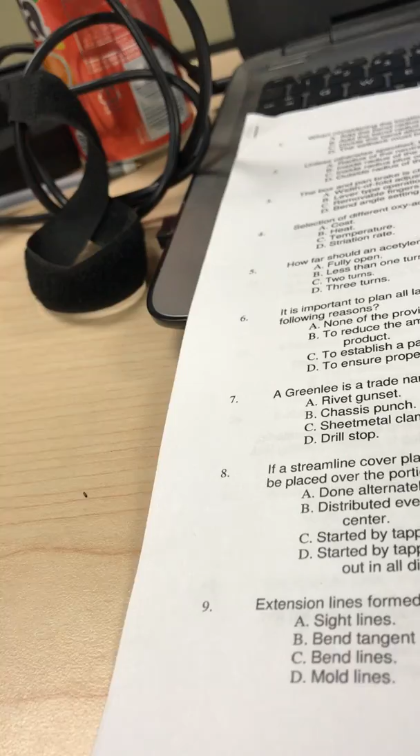I'll review them, any of them you like me to do, just let me know what number you got. What exam. I have to use a calculator. Yeah, go ahead. Yeah, 86. You have to use the calculator to figure out you have 86%. Yeah, I didn't. It's like 2% each or what? Yeah.

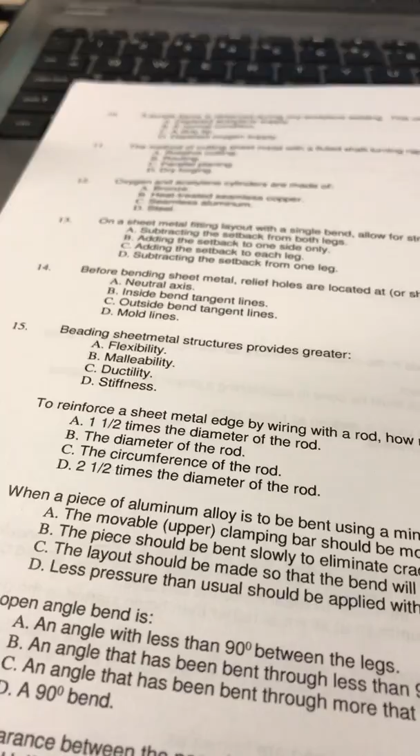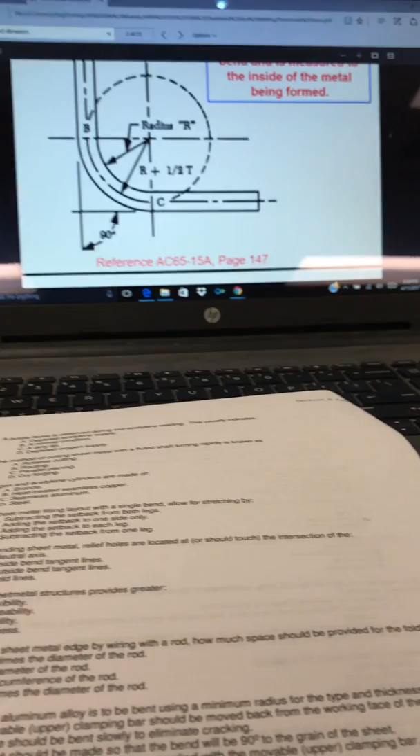So number 11 is. Could you go to number 11 on form B? B, yeah, number 11. B11. That one was a little confusing.

B11. The method of cutting sheet metal with a fluted shaft turning rapidly is known as routing. If they have a lot of parts in a production world where they're trying to make airplane parts all the same, they take a group or at least a stack of aluminum, put it on a template, then run that against a router in order to carve out all of the parts at the same time. They do the same thing in woodworking, but it's usually a one-off piece only, while in sheet metal work multiple pieces are done at the same time. So, routing.

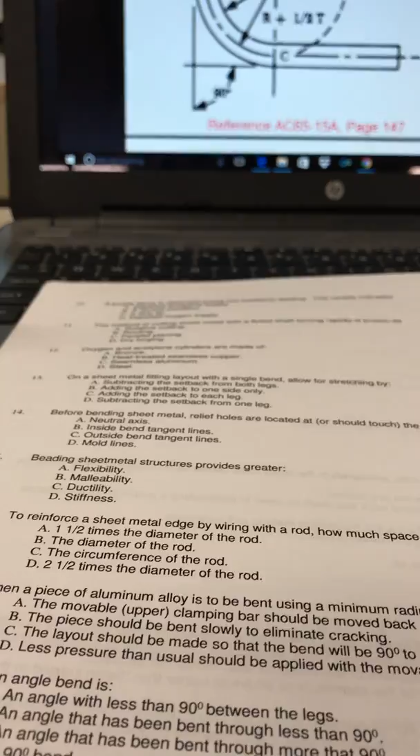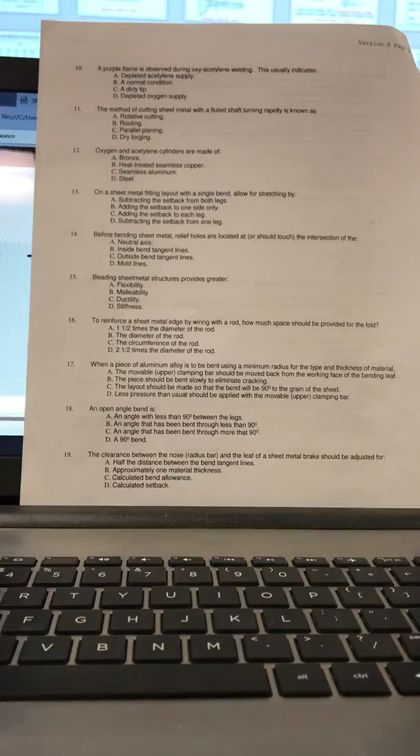Which one? 36C. 36 on B. C. Sorry, 36. C36. I don't even remember talking about concave.

36. Which statement about forming a concave and convex formed flange is correct? Well, let me look at a slide, maybe take a look at it.

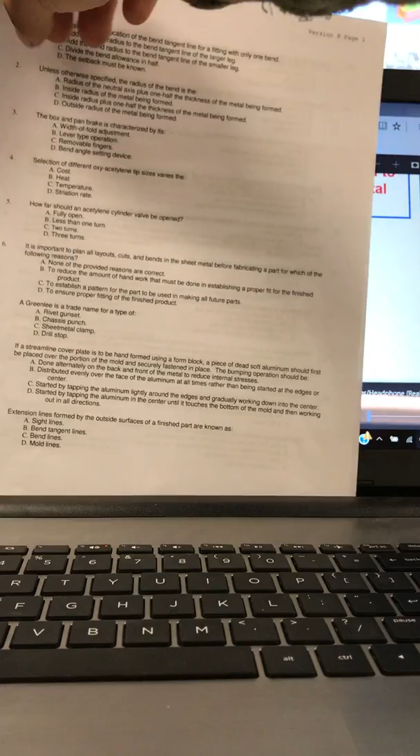Concave, or anything that's being built on a concave, is generally stretched, because what you're doing is forcing the material into the confine of something that is larger than it originally was. So you're stretching the material. For example, if you're trying to make a blister and tapping the material into the mold, you're actually stretching the material. Same thing with anything like a curved flange. Well, let me show you a picture.

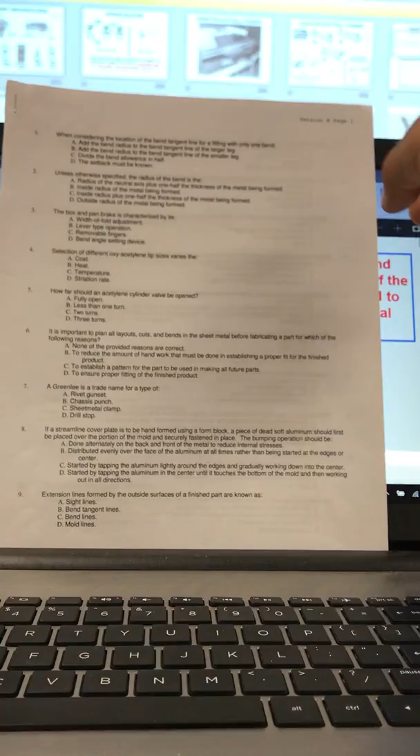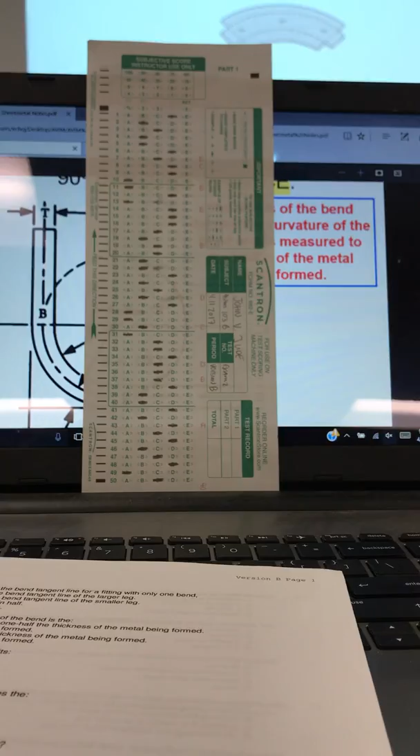Curved flange. They showed this briefly also in that Army video I showed you last week. Here's an example of the concave side of it and also the one that's convex. On the concave side, what they're doing is stretching, so they're doing this side of it. What you kind of have to think of, this represents a portion or an arc of a circle.

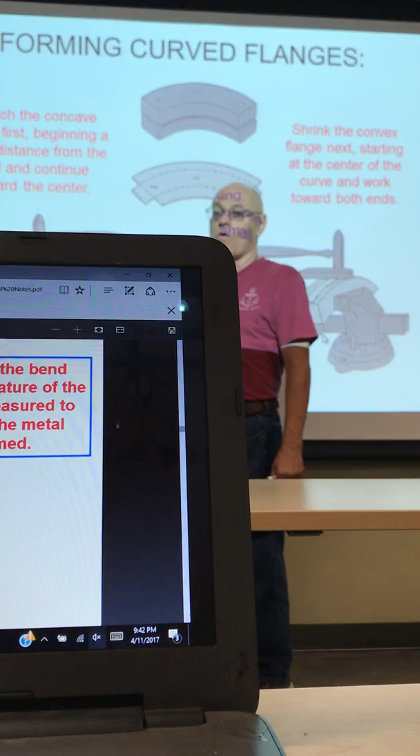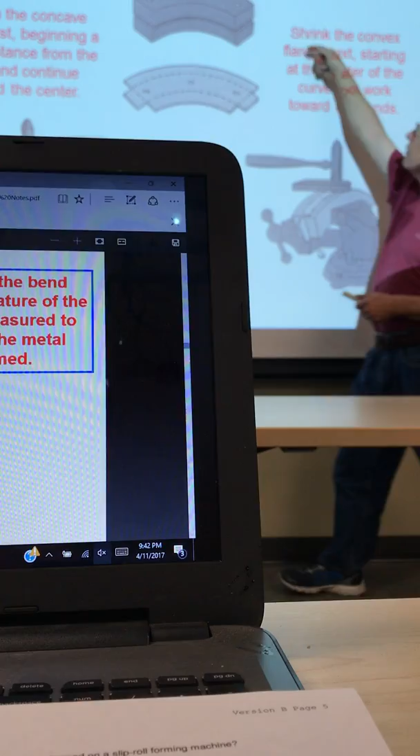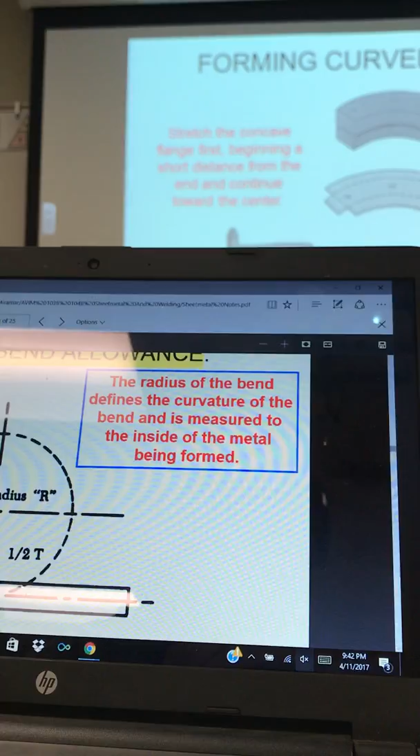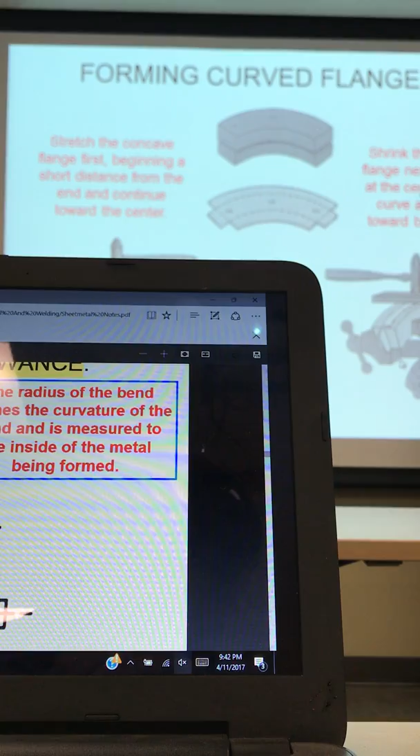So what they're doing is taking the aluminum and bending it over on the inside surface of that thing. The material is spreading out over a wider area, so technically it's stretched. On the other side, what they're doing is tapping the material over. The material is forming into a smaller area, so it's actually being shrunk. In that case, they have to prevent it from buckling over. A lot of times they'll use a forming block to tap it over the side. But in this case, it's actually been shrunk, formed over a smaller area.

Okay. So, thank you, let's see. That was question what, 36? 36? You got that one wrong too.

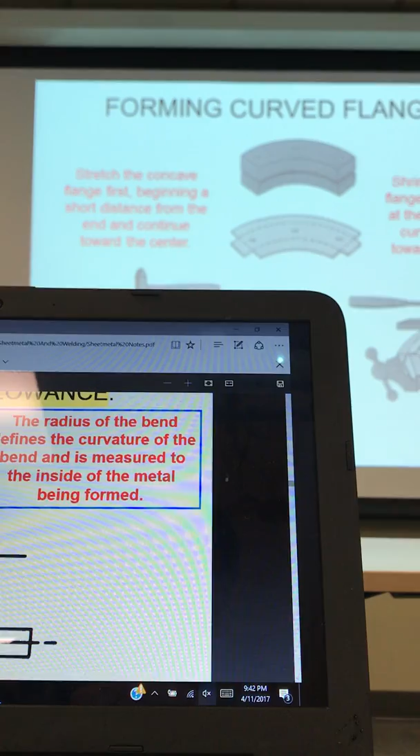34. Which statement about forming concave and convex formed flanges and parts is correct? Looks like the concave one is stretched, so the correct answer looks like A. It's A.

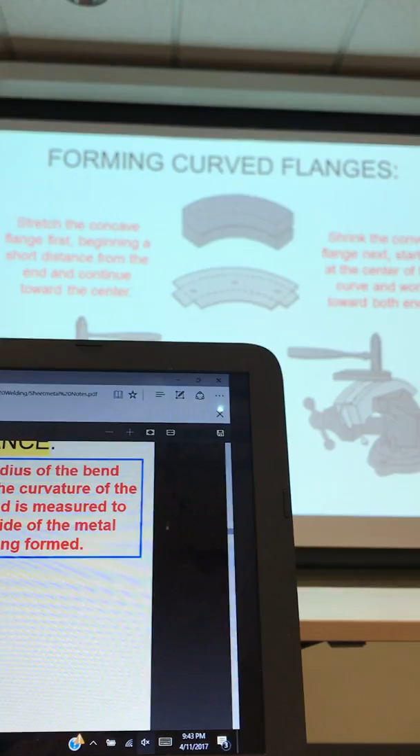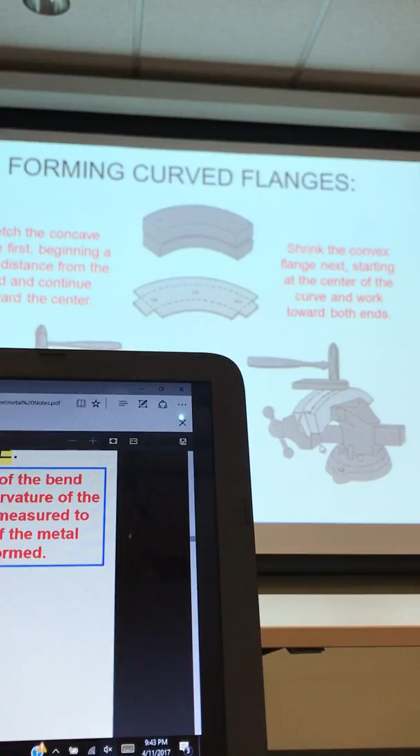6. Any of the others?

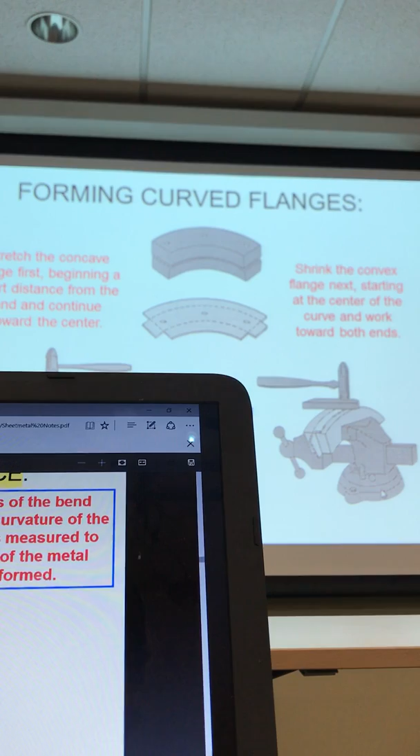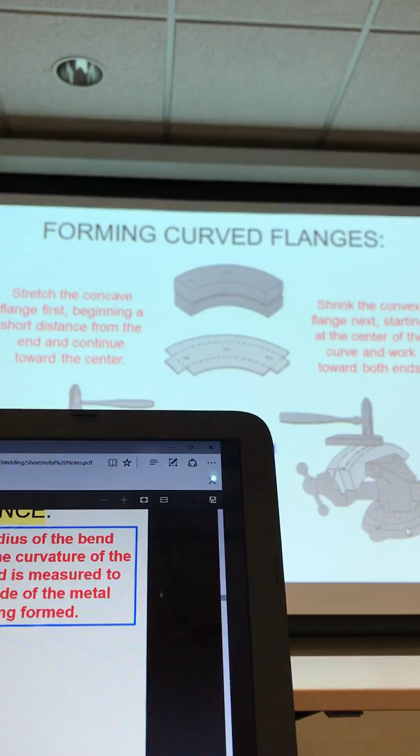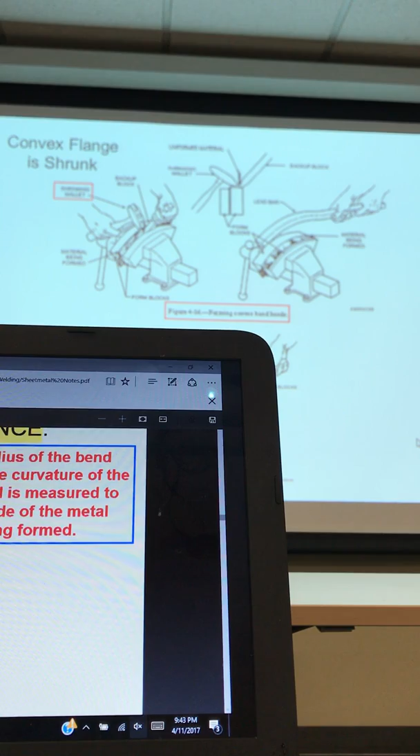34C. Okay, that's pretty good.

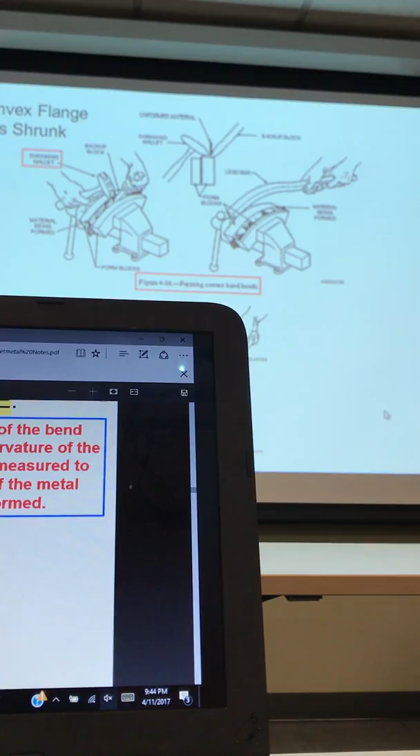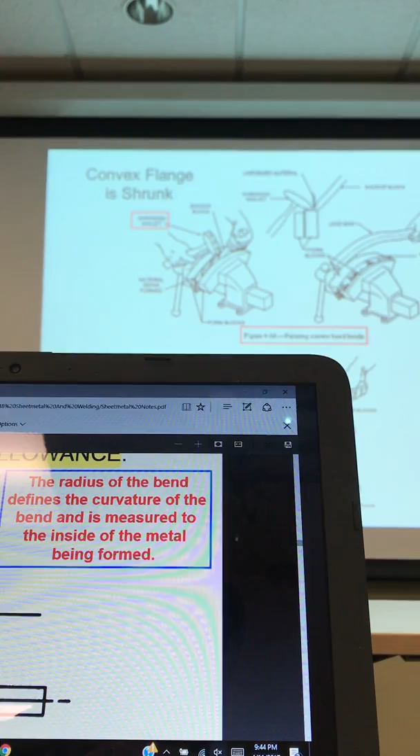34, an open angle bend of .032 2024-T3 is made using a 1/8 inch radius. The material is bent through 50 degrees. The finished length of the legs are 6 inches by 1 inch. Somebody else thought that maybe there wasn't really a correct answer in there. Let's see if we can look at it. We got a 50-degree angle, so we'll call this 50 degrees. So it's been bent through 50 degrees.